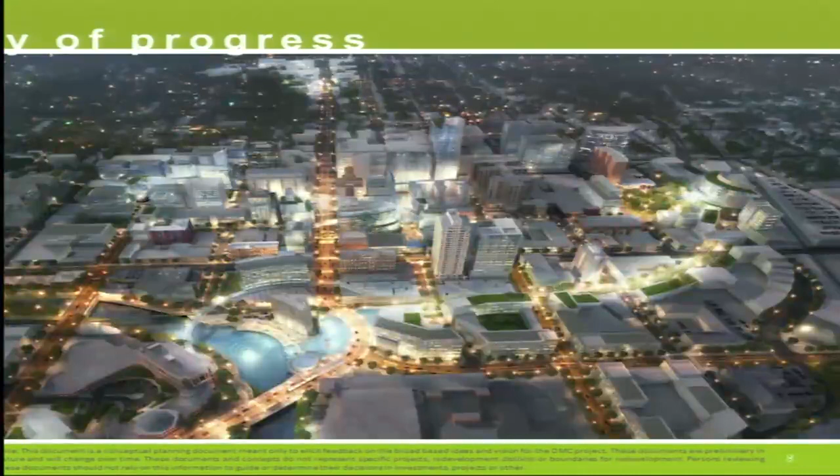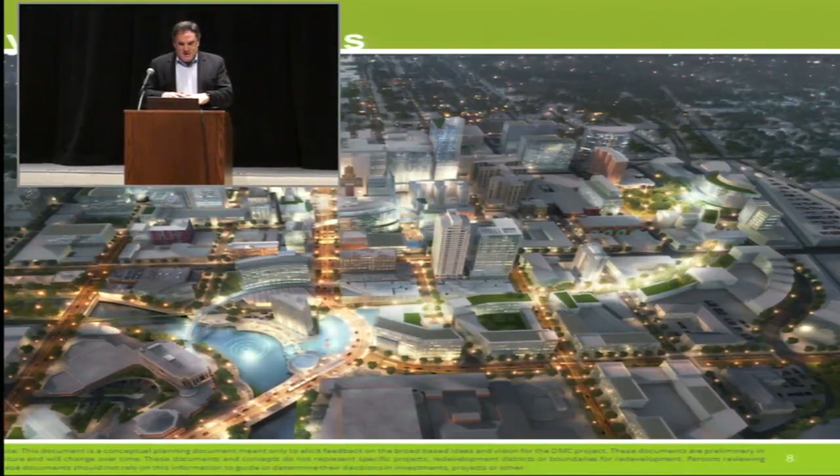This is an overhead view of what Rochester may look like 20 years from now. As Lisa said, the plan is illustrating $6 billion worth of investment. So we're taking that $585 million and investing it in a strategic and judicious way so we can attract development into the downtown and enhance the whole downtown area.

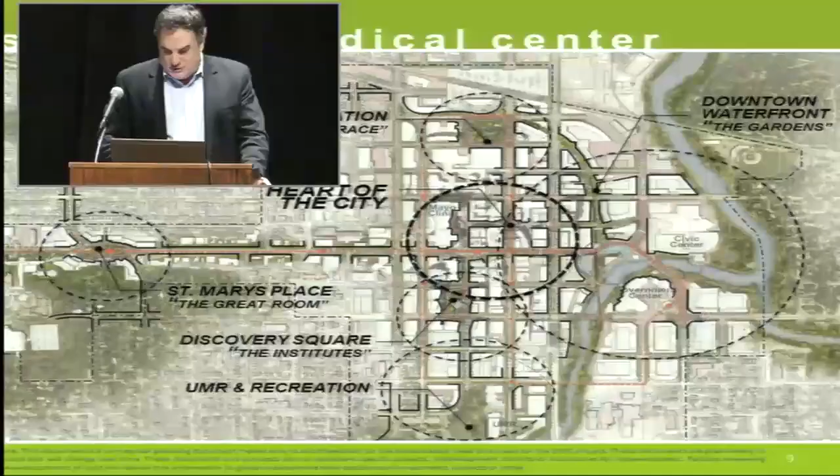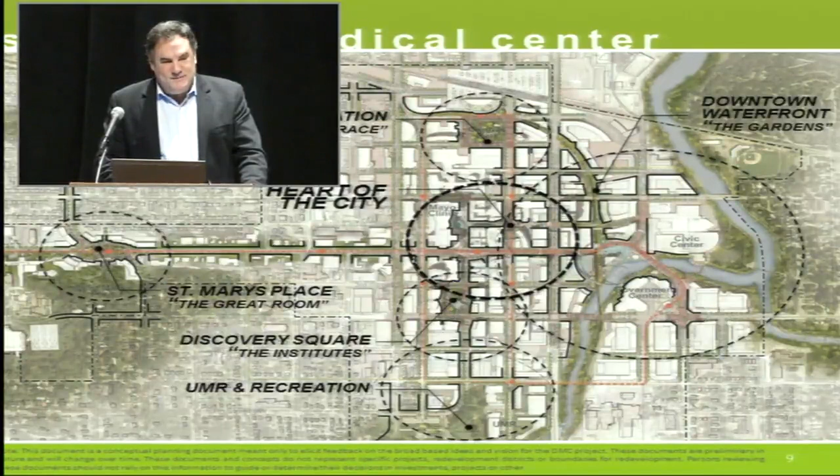So you see a very vibrant place, but you still see the structure and fabric of the existing downtown reading through this image. The plan is totally integrated—a series of key places that are very inclusive, that will create new addresses for residents, new businesses, and healthcare facilities, all connected in a compact urban core that makes it really convenient for residents to live within the heart of the city.

The heart of the city is really the first place where we want to start. It's the most visible part of downtown, and we've identified a location, First and First—that's First Street and First Avenue—where we think we can begin this development. We chose that location because it's right in the heart of Peace Plaza, but it's also within the heart of the existing cluster of buildings downtown. I'll tell you a little bit about what we've envisioned for First and First.

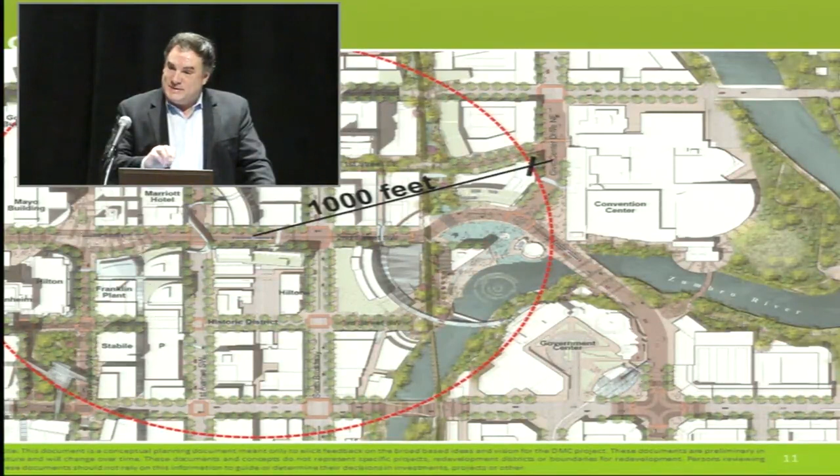The First and First location is part of this connected city. We use this diagram to illustrate what the city will look like perhaps in 20 years. Again, the plans are flexible, they will evolve. One thing we've talked about as a team is that even though the designs are very specific to illustrate the ideas, we can be very certain that as we go forward into implementation, these designs will continue to grow and evolve and adapt to the criteria we need to respond to.

So it won't look exactly like what you see tonight, but the principles will remain the same.

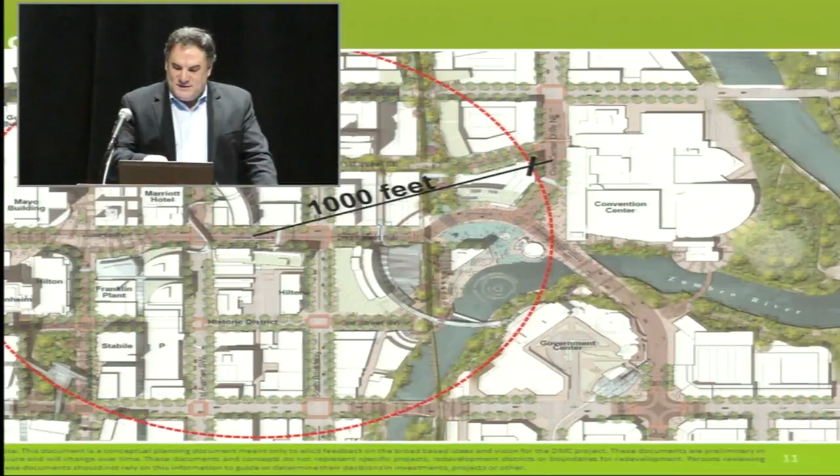The 1,000 feet is really to indicate how connected the downtown currently is. If you look at this drawing, you can connect from the Mayo Clinic at the Gonda Building to Discovery Square, which is just south, that beautiful park just south of the Gonda Building. You can get all the way to the convention center and the waterfront. All of Peace Plaza is connected within that 1,000 feet. So really all of the great destinations, amenities, and facilities within the heart of the city are very conveniently located with one another.

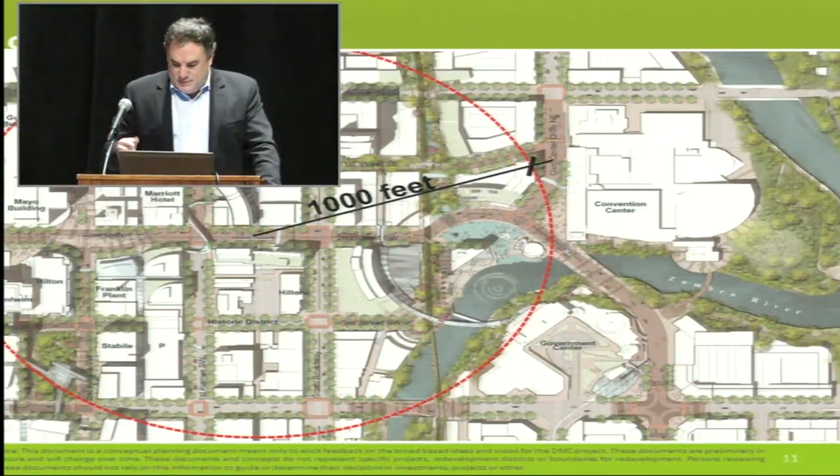We're going to take that attribute and build upon it as we develop this plan. We want to continue the vision established by the Plummer Building and the aspiration that reflects. Our architecture needs to be bold. It needs to reflect the new technology and economic development we want to create, while always respecting the past, featuring the past as part of the cityscape, and being inspired by the vision established many, many years ago.

So the First and First plan really contains many great places. It contains a new entry point that we're calling the Portal, which is on 2nd Street, right at the doorstep of the Gonda Building and the Mayo Clinic. It will be the front door to the Peace Plaza area and Mayo Clinic, as well as the front door to Discovery Square to the south.

We have a feature that we're calling the Light Pavilion. That's a covering over First and First that will be a must-see destination, marking that as the town square within the heart of the city. We'll talk about how that's going to generate new development within Peace Plaza and maybe correct some of the design flaws that we see there.

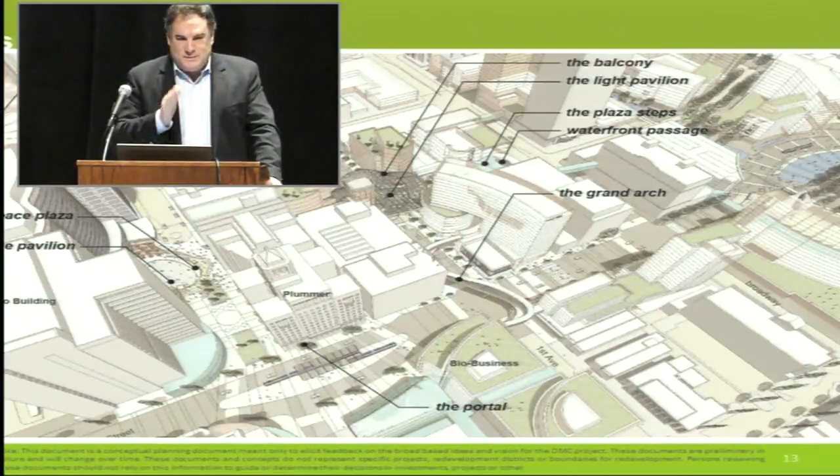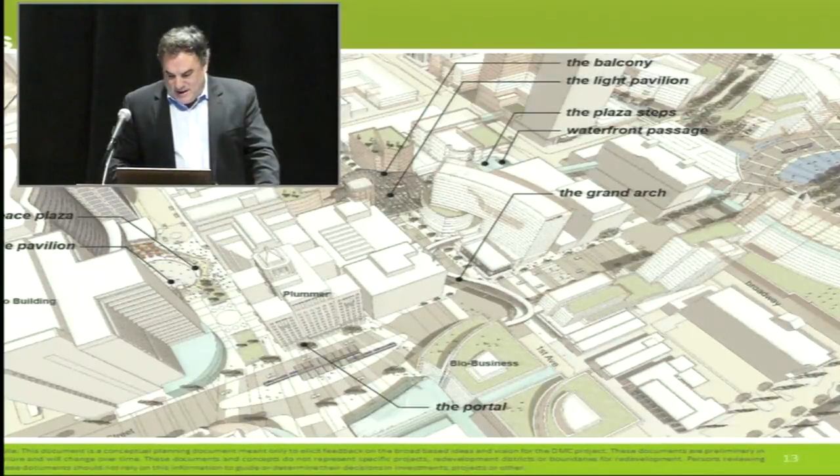We also feature the Plummer Building. It's a beautiful, iconic structure that already exists. How can we flatter that building by creating this beautiful crescent shape of space on 2nd Street, to flatter that building and make it an even more important structure within the downtown.

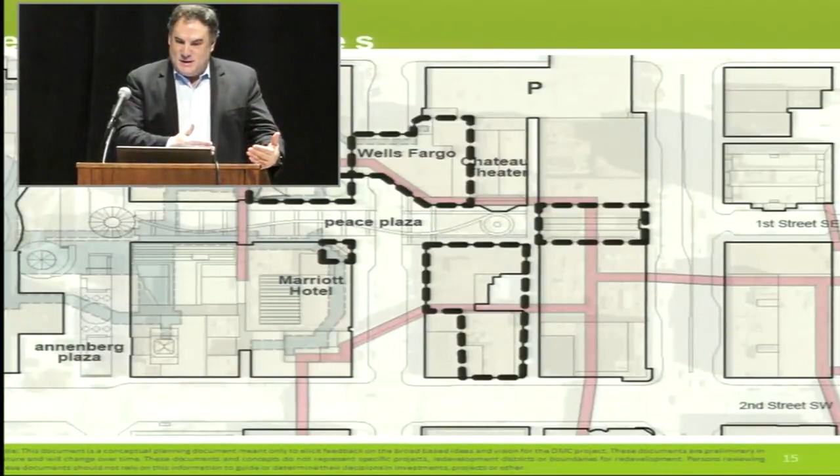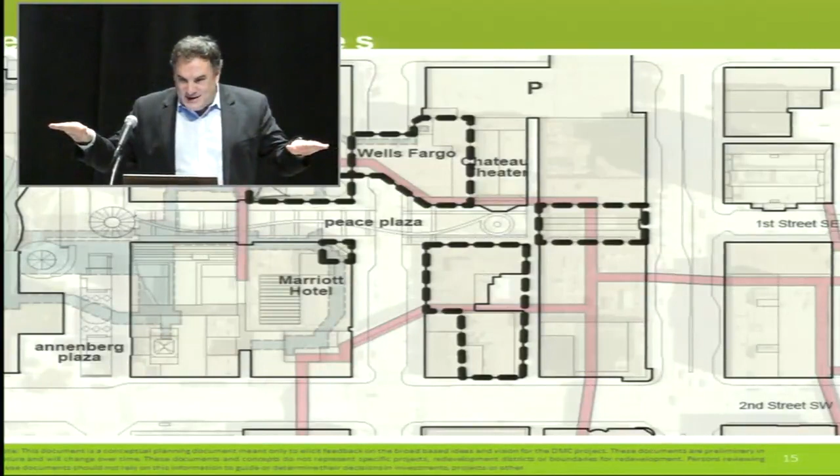We also have the opportunity to really connect the Skyway system and the subway system to the street. You go down in the subway on any given day in the wintertime, certainly at the Gonda Building, and there's lots of activity, lots of people walking around, but you go up in Peace Plaza and you don't see anything. So we want to reveal that activity and make it more connected to the street, and the same goes for the Skyway. This location is where all of those systems come together.

Here at Peace Plaza, we see a great opportunity to leverage the Chateau Theater. It's currently the bookstore, which is going to be moving out soon, and we see the Chateau Theater as a great opportunity to reestablish it as a theater, providing space for performances and cultural venues, but also using the theater as a way to theme this First and First location and make that location more dramatic, more theatrical, and more reflective of being the center of the city.

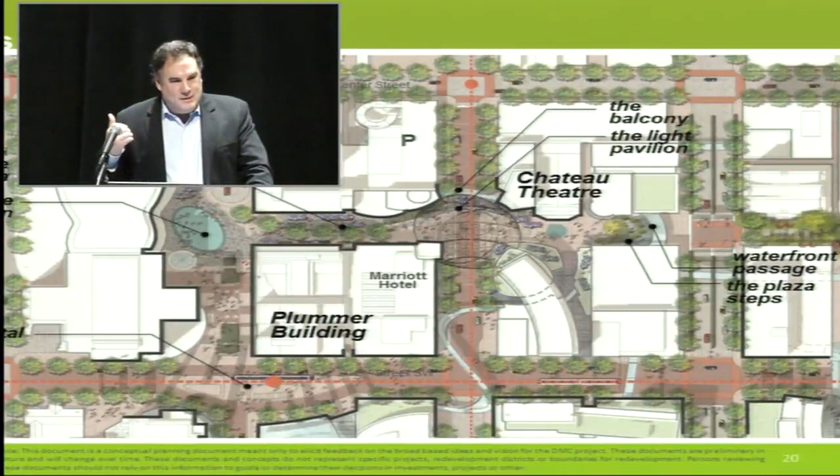Healthcare is generally a very scientific, and sometimes cold, environment, and we think bringing more active programs that are warm and inspiring will benefit patients, but it also will benefit the downtown.

Just to the south of that, along the Plummer building, we have the portal. We're creating a beautiful crescent-shaped public space at the base of the Plummer building, using the tower of the Plummer building as the axis of that space, so it feels specifically designed for the Plummer building. It also acts as a front door to Peace Plaza and the Mayo Clinic, and a front door to Discovery Square to the south.

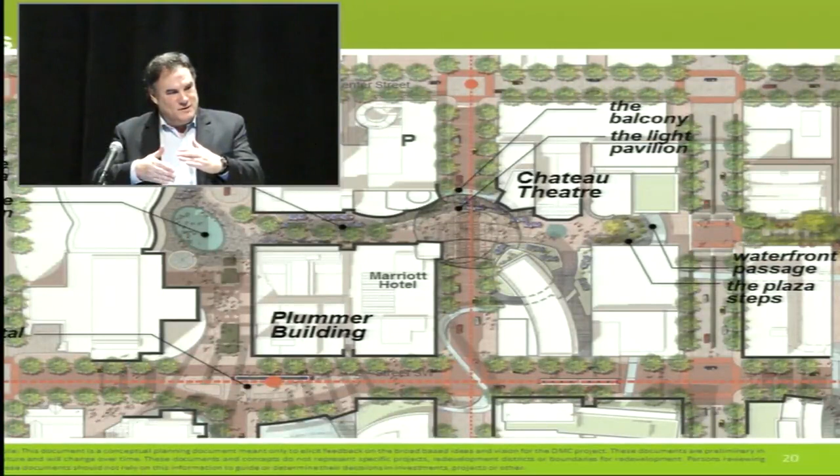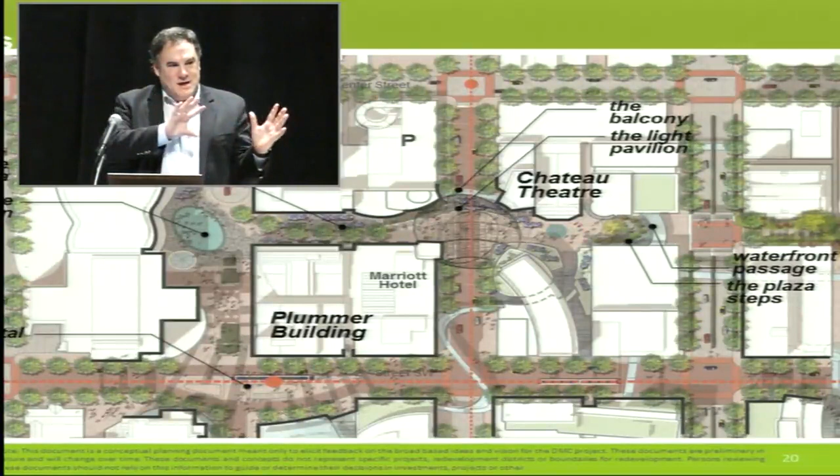On the far east end, we've created what we're calling the Waterfront Passage. This is the end of Peace Plaza that's currently blocked off with the shopping mall. There's an entrance there, but a lot of people have said it'd be great if we could make a stronger connection to the east. That connection is very important to developing our downtown waterfront. We want to take that activity and make a free flow between Peace Plaza and the downtown waterfront.

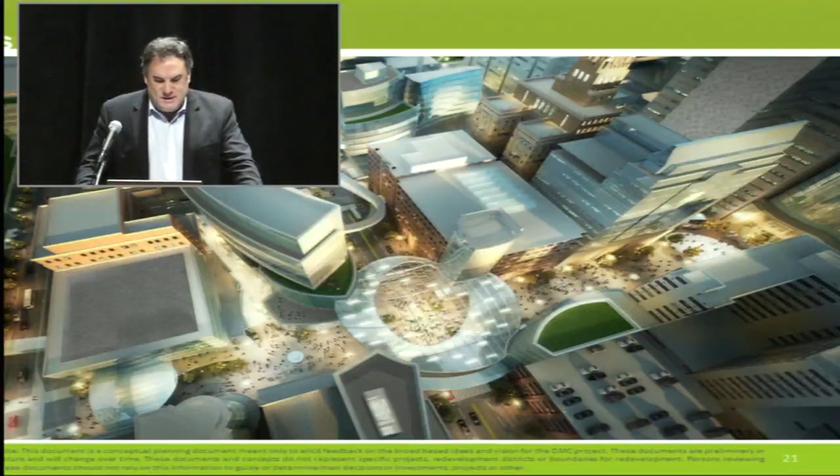So this is an overhead view of the Light Pavilion. You're looking to the southwest. The Light Pavilion spans across First and First, and it's sort of a ceiling over a great space, like the Galleria in Milan, like Potsdamer Platz.

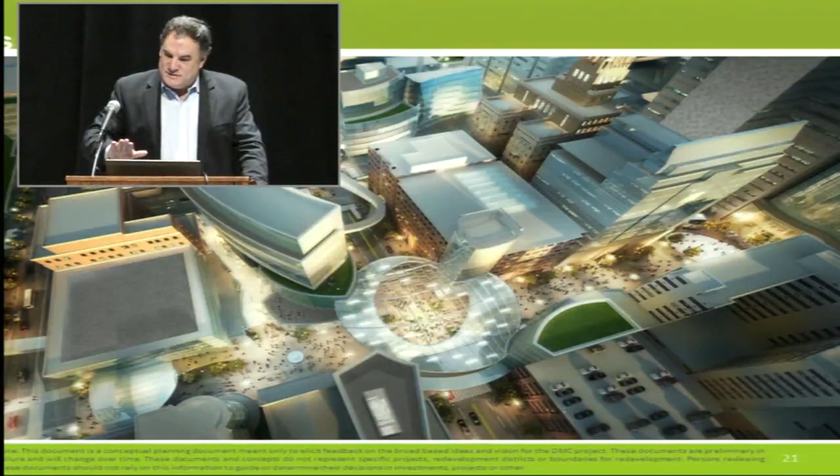It's connecting four blocks. We've recast the bank building so that it becomes a beautiful terrace that overlooks Peace Plaza. We've connected the Chateau Theater into the architecture and placement of that space so we can bring in the historic qualities and the great memories of the Chateau Theater.

We've also shown new development. Some parcels have been bought recently by developers, and we want to encourage that private development, but use it in a way that complements our overall vision. So it's totally integrated, specifically designed for this place—it can exist nowhere else but at First and First in Rochester—and we think this is a great way to accentuate the heart of the city.

On either side, you see on the right-hand side of the screen the Ice Pavilion. I'll show you some more photos of that.

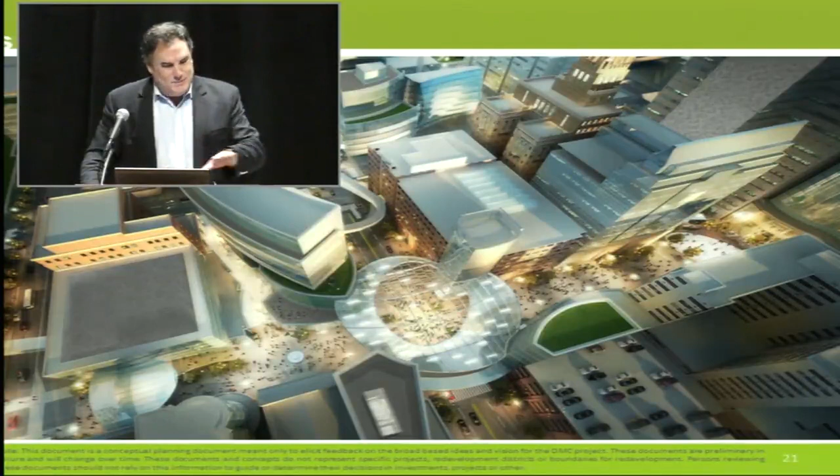On the left-hand side of this, you see the waterfront passage that we're creating to move to the downtown waterfront. This balcony space is like the balcony at the Chateau Theater, and this is a view of the Lincoln Center balcony just outside the theater doors.

We want to create a place for people to look out during performances and see the activity happening in Peace Plaza, also creating a beautiful dining vantage point for people to have meals before movies at the Chateau Theater or before they go shopping. We want to reveal that activity in everything we do in this space.

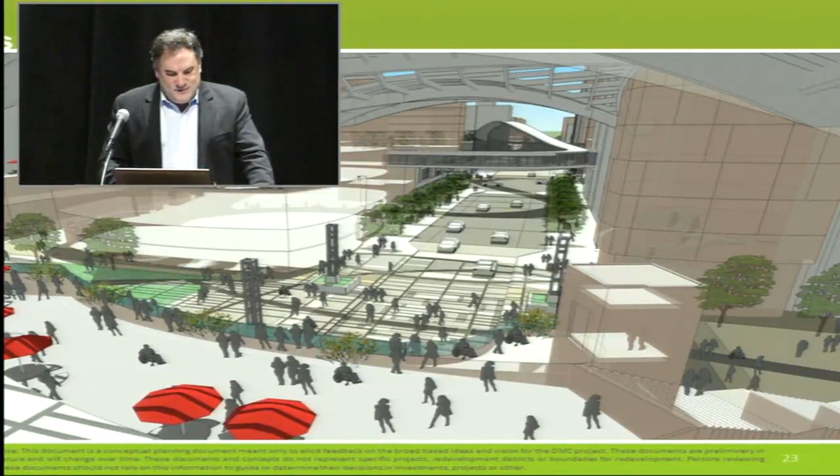This is just a sketch view of what that might look like. You see the beautiful balcony in the foreground there, looking south on First Avenue, and all 4 corners totally integrated into this plan, with a beautiful ceiling across the First and First location.

This is the Gonda building base, and even though it's a very beautifully designed base to the building, it's sort of closed off. It also has the subway and skyway system all coming together in that location, and you see the photos on the right-hand side.

The spaces in the subway can be sort of foreboding and very mundane, so we seek to really open them up and make them more contributing to Peace Plaza. We think we can open up the base along Gonda Tower and make it something that really contributes to the overall activity.

This is a view from the atrium space within the Gonda Tower. You see the Plummer building in the distance, and you see the ice sheet in the center of this view.

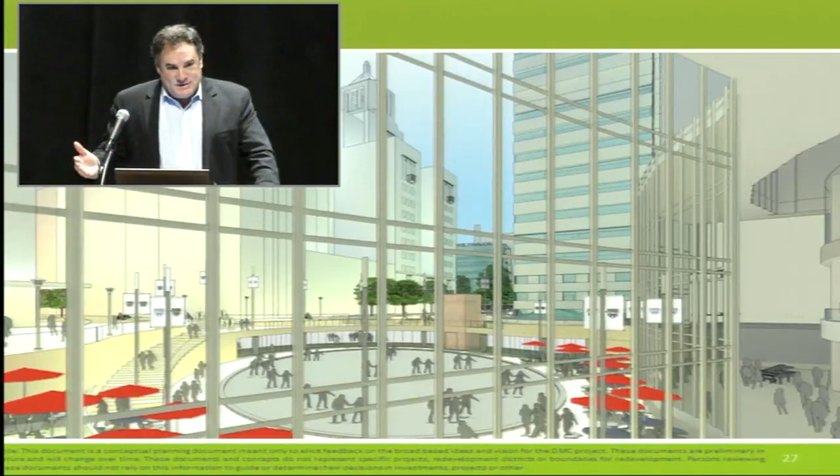The existing passages will look out on this beautiful plaza, so daylight will come down into the subway system, and this will create a more welcoming and warm atmosphere for visitors, patients, workers coming to the clinic, as well as people coming to Peace Plaza.

This is another overhead view of how that space might be knitted into the fabric of Peace Plaza, again reflecting the entrance to the Mayo Clinic, the Kaler building, reflecting the entrance to Peace Plaza, but really creating a central place, a real crescendo at the west end of Peace Plaza.

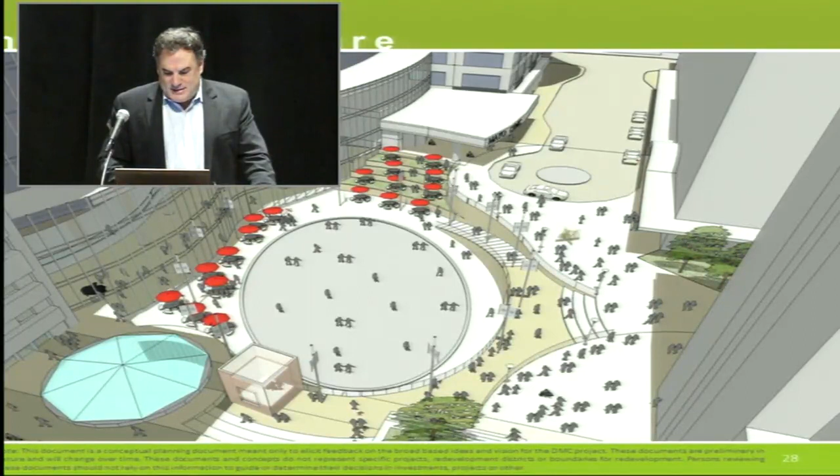And then on the east end, we have the shopping mall. The gesture is there—there's a passage, there's doorways that allow you to go east to the waterfront, but it needs to be made more gracious, grand, and welcoming.

We use this moment to talk a bit about downtown businesses. You see these plans and how we're creating new development, but we want to talk about how local businesses can make up that fabric and that activity and economic development within the downtown.

I'm going to ask Bill to make a few comments about businesses that are local to Rochester and how we keep that as part of the plan.

Thank you. The development program for the plan is based on a market analysis that we talked about in the summer. In that, we were looking at the incremental growth, and so the plan reflects the existing inventory of space for businesses and then accommodates incremental growth beyond that.

So it's not accommodating space to replace what already exists. To the extent there might be a site where somebody replaces what already exists, that inventory could be added in addition to what was estimated in the market analysis.

But there's also a strategy for when you're positioning a downtown to create that authenticity that comes with locally owned businesses.

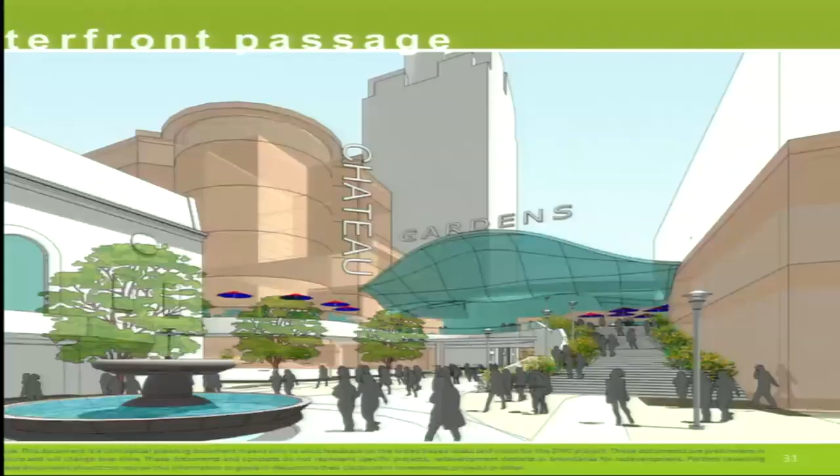So to continue then with Peace Plaza, this is the east end of the Peace Plaza, recast to create a beautiful canopy and a welcoming passage that will take you to the waterfront as well as connect to the Skyway system and also flatter the Chateau Theater. Again, we want to extend the energy of Peace Plaza and create more opportunities for those local businesses to really populate the ground floor retail and make a really truly unique Rochester type of place.

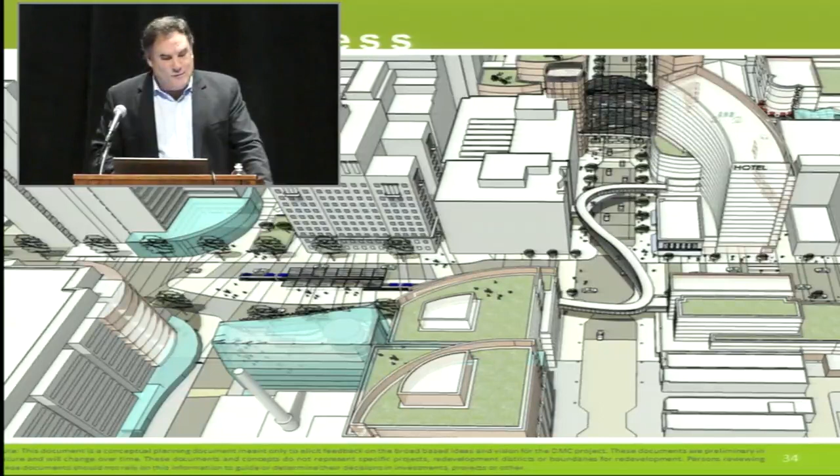We also will create ground level passages that are weather controlled so that we don't rely exclusively on subways and skyways, and really keep the activity at the street level. As I said earlier, we're using the great architecture that currently exists at the Plummer Building and other areas within the downtown and making it really a focal point within the plan, creating this beautiful portal space on 2nd Street that looks like it was specifically designed for the Plummer Building, making a front door to the Mayo Clinic and to Discovery Square.

So that's a good transition to Discovery Square, which is really the focus of a lot of the economic development that we see within the plan. This is 2nd Avenue, looking back to the north towards the Gonda Building and the Plummer Building. Today it's a parking lot, but we see an opportunity for lots of new addresses for science and technology in the city. So this is the overhead view of Discovery Square.

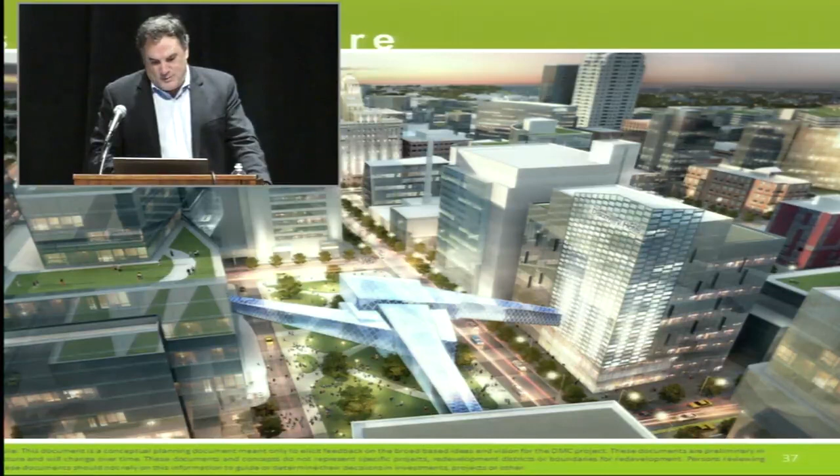Again, looking north, we see new development all built around a beautiful urban square that will not only create the address for science and technology and a global destination for these new companies and businesses to be located, but also a great place for the residents and visitors of Rochester to enjoy as part of an urban experience. We will have architecture that's very adventurous, but also keeping a memory of the past and always featuring the past in everything that we do.

The translation cloud will be one of those features that we incorporate within Discovery Square. We'll also build upon the existing Bio-Business Center, and we will grow that and give it even more of a greater presence on 2nd Street and on to Discovery Square.

We see Discovery Square being an authentic urban place, much like Union Square in San Francisco, where normal urban life occurs, but it also creates a wonderful address for economic development and science right at the doorstep of the Mayo Clinic. This is an overhead plan view of what Discovery Square would look like.

We've taken what was once a parking lot and made a beautiful urban square, providing automobile access and streets all around all four sides. We've created development parcels around that square so we can locate the new lab buildings, the new science and biotech buildings, giving them addresses on that space, woven into the fabric and structure of the downtown street system.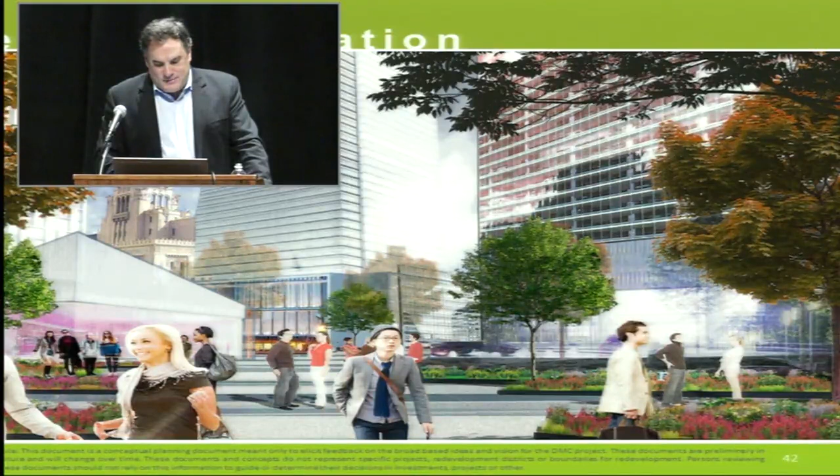Another place we've created is the downtown waterfront, a new neighborhood we're calling the Gardens. We want to build off the natural features of the downtown Zumbro River, as well as the open space amenities that currently exist. There's a beautiful opportunity here to finally connect the downtown to the waterfront for the first time.

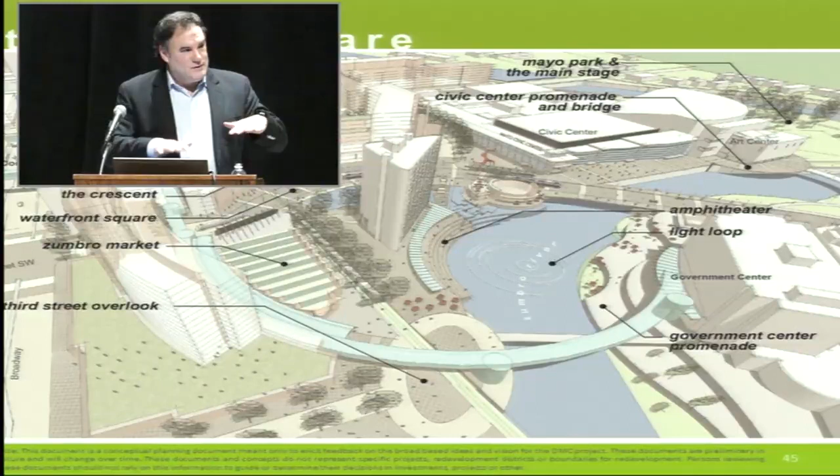We've created a very exciting, bold plan that takes all the land surrounding the bend at the Zumbro River, right at the foot of 2nd Street, and integrates those parcels in a way that embraces the waterfront, reflects the bend in the river, and incorporates other water elements so you see water when you look down 2nd Street. There's been a lot of commentary about how the river is hidden from view by the walls and because the water is lower, and we've found ways to create additional water elements that look connected to the river but are up at city level, reinforcing and extending the river's presence within the downtown.

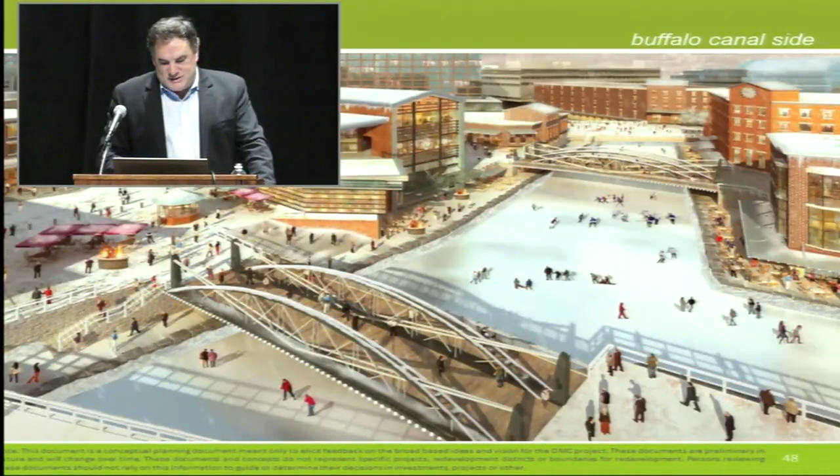In Providence, Rhode Island, they've taken their river and made it a water town square, which has totally transformed downtown Providence. In Buffalo, we're doing the same thing, creating new canals that look like an extension of the Buffalo River, a nod to the Erie Canal where it started at Lake Erie and the Buffalo River, creating new water environments that extend the river environment.

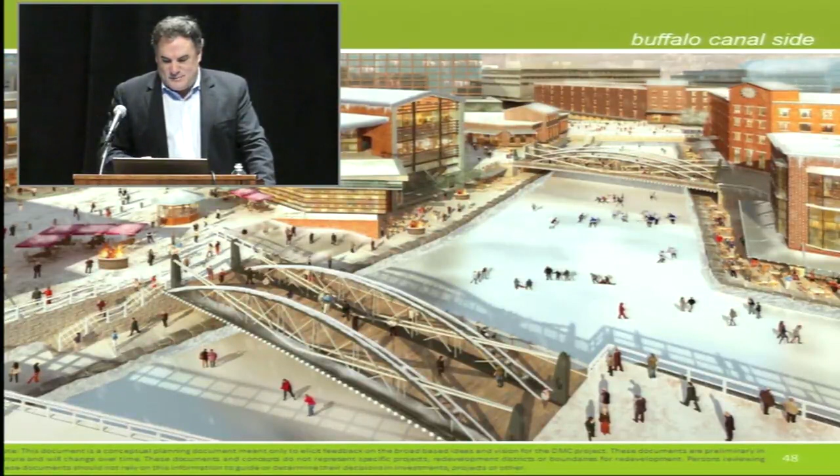This plan also currently shows an option where the library is relocated within the downtown plan. We looked at this because, while examining the waterfront and its opportunities, we understood the library is looking to expand and grow, and we see an opportunity to marry that aspiration with a chance to create more public space at the riverfront, while still incorporating the library within the overall downtown plan.

The actual design, location, and plan for the library is still to be determined, but we think there's an opportunity for the library to better expand its programs while also creating a great new public space right at the foot of 2nd Street and the Zumbro River.

This is the overhead view showing the space called Waterfront Square, which is currently where the library is located. We've taken 2nd Street and created a gentle curve in it to reflect the bend in the Zumbro River, and we've also repurposed the railroad spur as the Crescent, which will have many cultural venues and amenities anchoring it as a great new urban neighborhood.

We've incorporated the Zumbro Market right adjacent to that railroad spur, where we'll have a farmer's market, gourmet shops, and restaurants that really create an attraction to the downtown.

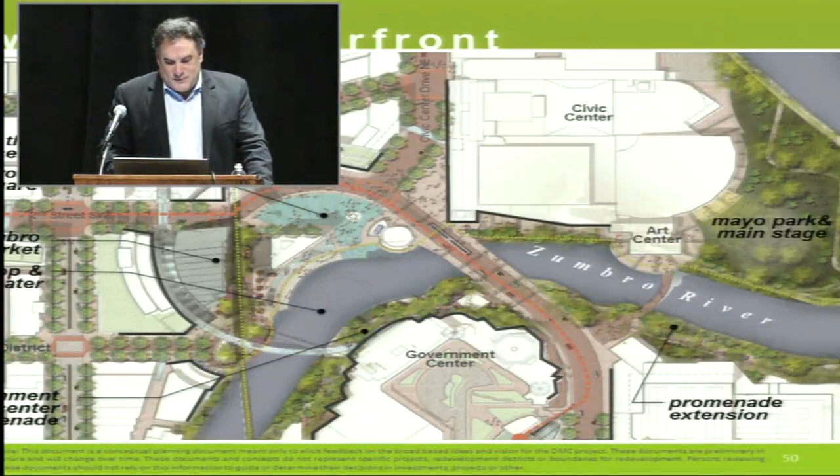You see also in this plan, the Civic Center has expanded into the oval right at the front door of the Civic Center, and so it actually feels closer to the downtown. We've created a beautiful new setting for visitors to see out to the water as they come to the Civic Center, with many amenities to utilize there, as well as for residents to gather and create a waterfront square that belongs to the entire city.

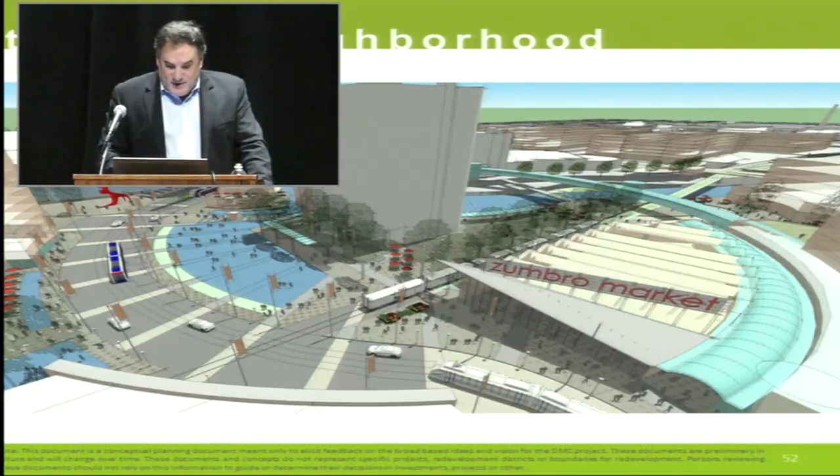2nd Street is the curving street on the left-hand side. The Zumbro Market is on the right-hand side—that's currently a parking structure at the end of its useful life. We think that would be a great location to have the market be a real anchor to this neighborhood. You see the water has been brought up to city level and is now the terminus to 2nd Street. We've also repositioned the Skyway so it embraces the water and integrates the waterfront, the Civic Center, and other development within the heart of downtown.

There's been a lot of questions on how we've recognized and incorporated historic fabric. If you look closely at our plans, we've reinforced all the historic gems that currently exist within the downtown. As the waterfront is concerned, we have historic 3rd Street right there within our plan, and we like the small scale of the historic buildings. We like the memory, the tradition, and the culture they represent, and the local businesses that usually inhabit those storefronts. That will be a big part of the plan, not only in the waterfront, but in all areas within the downtown. If you look at our plans more closely as they come out, you'll see that we've taken great care to reinforce those historic elements so we build a full, beautiful downtown that has history and new together.

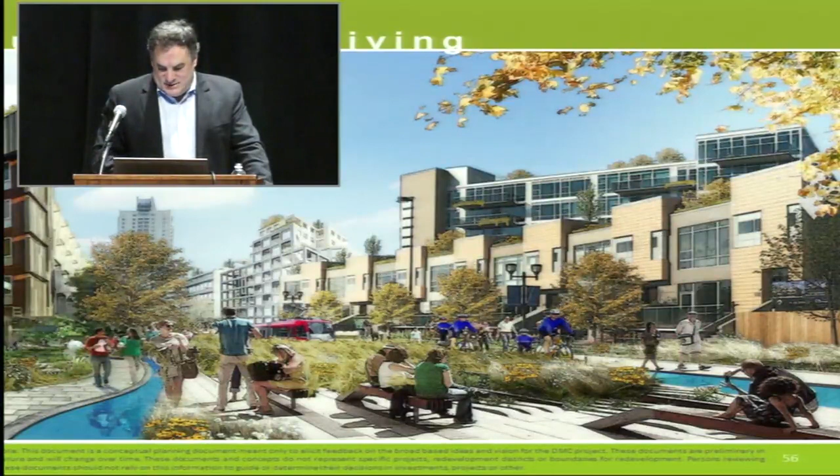There's also a lot of questions about affordable housing and how we'll integrate that in the plan, and I'll use the downtown waterfront, the gardens, as a way to explain our strategy. We will have a full range of price points and a full mix of housing types throughout the plan. This is a view of the gardens along the Crescent—you see low-rise townhouses, mid-rise buildings, some taller buildings. There'll be a full range of housing types and price points so we have a very inclusive and diverse community that inhabits the downtown, attracting the best and brightest from all over the world, as well as providing for residents that currently exist in Rochester who want to take in the downtown and make it their home. We'll incorporate that in the Gardens District, but also in all areas of our plan.

We also focus on sustainability, and people have asked a lot of questions about how sustainability will be integrated into the plan. Using the Gardens District as one example, we have a sustainability framework that's been utilized and established throughout the entire plan. In the Gardens District, we have water elements that, as one feature, will collect rainwater, filter it, and use it for irrigation, making the water cleaner and the environment more integrated with nature, among other strategies and elements included in a very full sustainability framework.

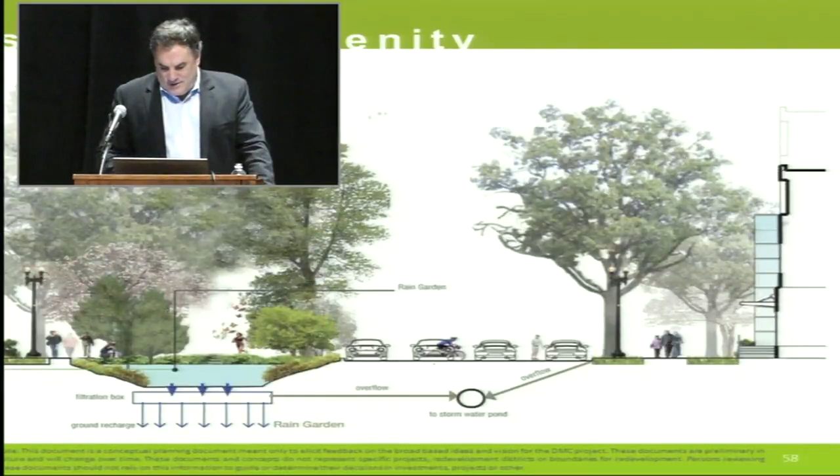Again, not just for the downtown waterfront and the gardens, but throughout the entire plan, the sustainability framework includes many components. It's not just about solar panels or windmills, but really a full lifestyle change that we want to propose for the downtown, making Rochester a model for sustainability and keeping those elements as part of all the new development projects we show within the master plan.

So this is an overhead view of the future waterfront square, looking to the west down 2nd Street. For the first time now, you'll see water at the end of 2nd Street. We have lively uses all around the water edges—new public spaces, restaurants, cultural venues, landscaping—really making it a place that will attract visitors and residents, and be a beautiful, postcard-like view of how Rochester created its authentic downtown waterfront.

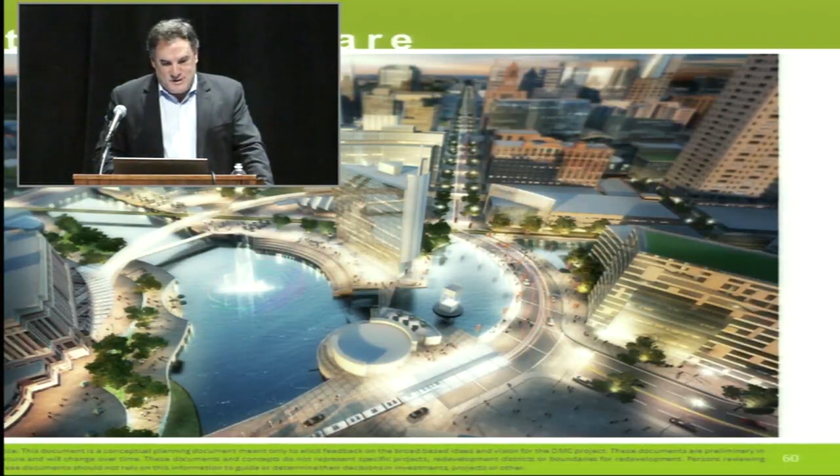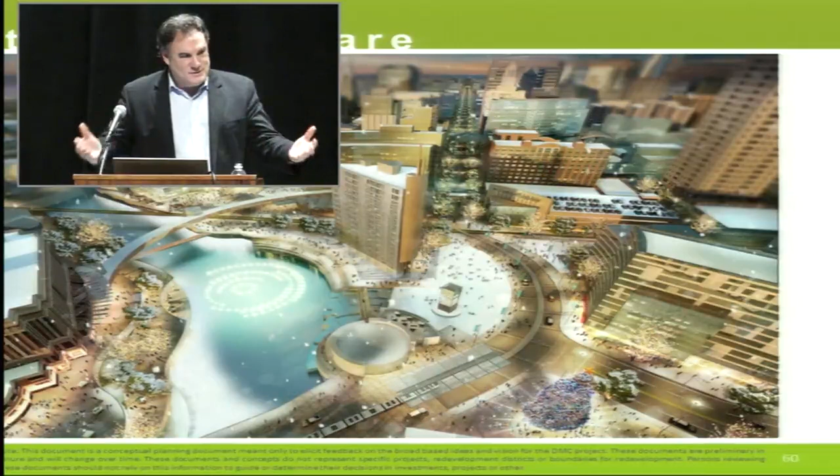And then, of course, for days like today, we will make sure that the design is done in a way that we have winter programming. We're showing here how the water at the foot of 2nd Street can be turned into a beautiful ice sheet, and we can have the giant Christmas tree by the convention center and other displays and elements that really make this a place that people will want to be in the wintertime, even when it is cold outside. So we've tried to make this something that really appeals and reflects the climate and the fabric of the city.

The next place is called Central Station, and this was an opportunity for us to take advantage of Central Park, which was an amenity that's sort of hidden in plain sight. The existing park is a beautiful oasis, and there's plans to redevelop the park, and we want to make that part of the arrival experience that people have when they come into the city. There's empty lots up by the railroad tracks that we think we can develop into transit amenities and parking amenities, so that we take the cars and the buses off the streets and put them up by the railroad tracks, but then use Central Park as the front door and the first thing that people see when they come into the city. Instead of seeing a parking garage or a highway, they see a beautiful green square.

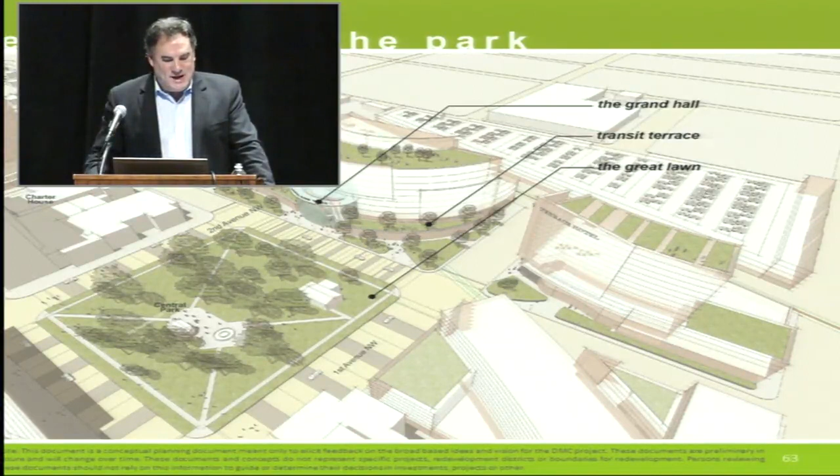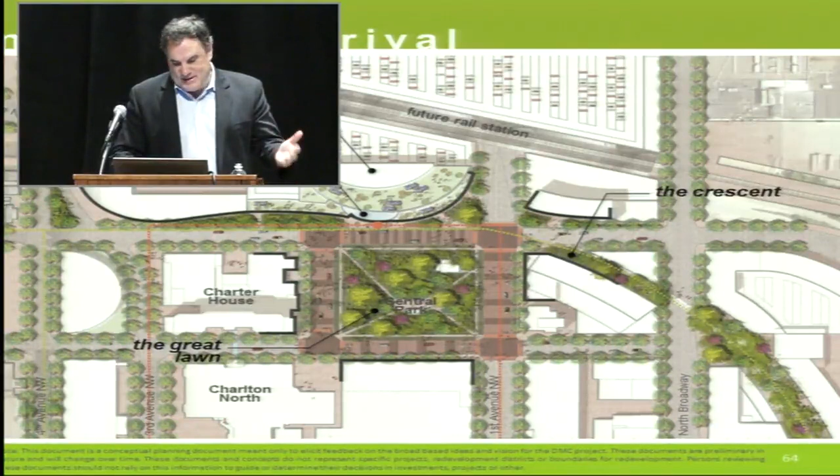And the wonderful opportunity that we have here, not only with the park, but its location, is that it's within very close walking distance to the downtown. So even though Tom will talk later about the transit facilities and the circulator that we're proposing for the downtown, this location on a nice day is also just 2 blocks away from Methodist Hospital, 3 blocks away from the Gonda Building, and other destinations within the downtown, so you can actually walk as one of your choices to arrive into work, and walk past a beautiful square as you come into the city.

One of the final places that I'll talk about is St. Mary's Place. When we first looked at St. Mary's, we saw how disconnected it was from the downtown, yet it's also one of the first things that you see when you come to the city. We saw those characteristics as a way to create a great new place that connected the campus to the downtown, and at the same time create a positive first impression as people arrive. We talked about how the highway architecture as you come off of 52 does not say anything about the culture and the excellence that Rochester represents. We think we can create something that's really much more dignified and reflective.

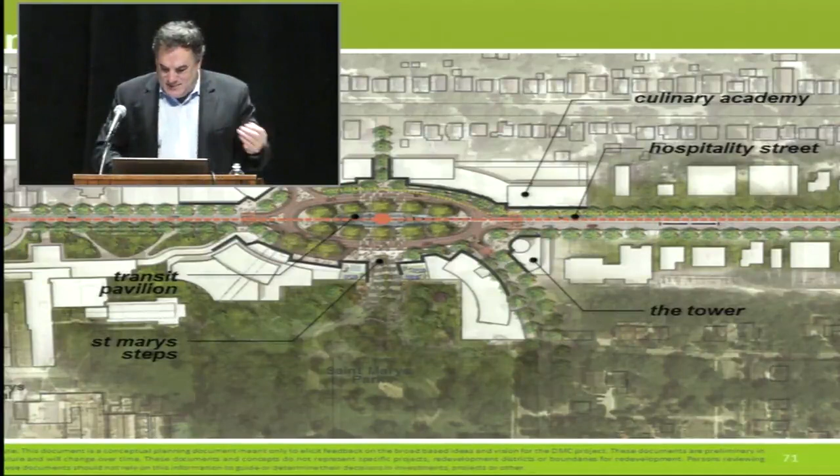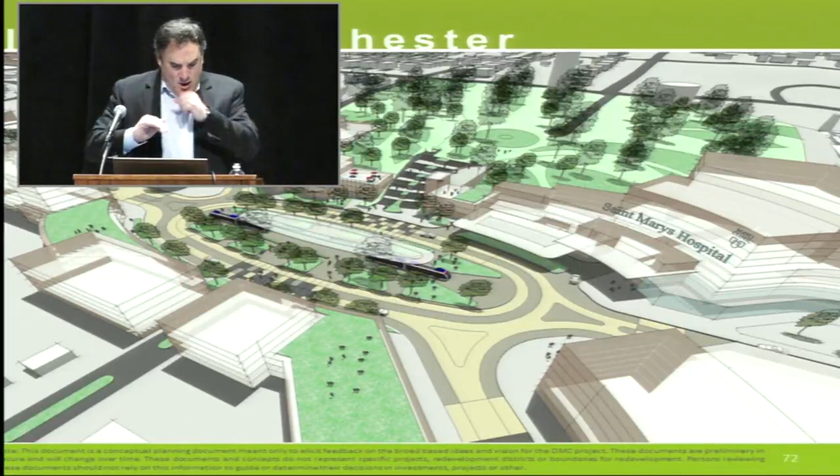St. Mary's is much more connected to the downtown. We've actually moved the front door of St. Mary's about a quarter of a mile further east, making it more connected to the overall city. This is an overhead view of what that might look like. We would make a connection up to the park with a stair, but also provide elevator access for ADA, so everyone can get to the park and move freely about the space.

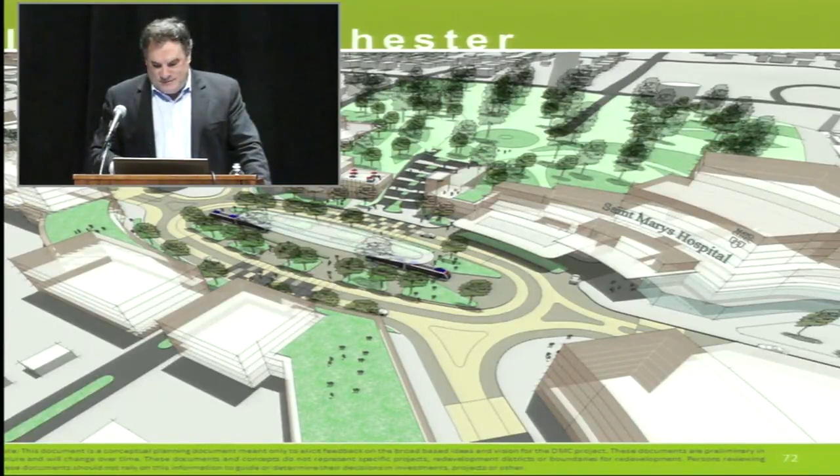The scale of development will be low scale. It'll feel more like a hometown arrival, really reflecting that attribute of Rochester that is really valuable - we have a hometown that really reflects a great address for Mayo. And so that will be the first impression people have.

So in conclusion, we see a city of opportunity, a totally integrated development, connecting the waterfront to the downtown, enhancing the city with a series of great public spaces, and creating a great place for people to both live and work within the heart of downtown Rochester.

So Tom's going to talk about the - sorry about that. Tom's going to talk about the transportation plan. Thank you, Peter, and good evening, Rochester.

Transportation is a key element of helping to realize this great, exciting, and I think very realistic vision. Transportation, as Lisa mentioned, is something that really supports all the aspects of what we're trying to create here - a fantastic, livable, healthy, vibrant community. So we've taken some of the questions that we've been hearing and hope to answer some of those as we talk a little bit about the transportation plan.

One of the things we recognize with this exciting initiative is that it means we're going to be bringing a lot more people into what's already a very job-rich downtown.

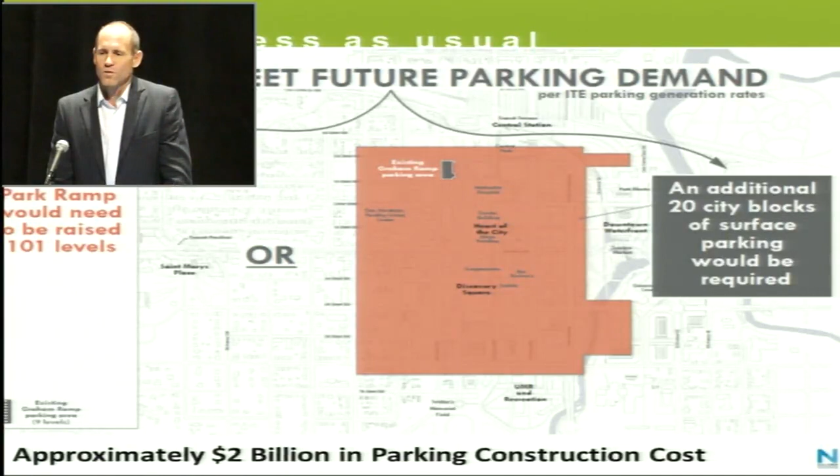That's good for today, but as we see this type of growth, we can't continue at that rate of mode share. We've done analysis, and that shows us if we kept a 70% drive-alone mode share to downtown, and we accommodated that through surface parking, we basically take up the whole downtown. If we built 6 or 7 story parking garages, we'd eat up 8 or 9 whole blocks of downtown with surface parking. If we tried to put it all in one ramp, we'd be 101 stories in the sky - pretty inconvenient if you're on the top deck.

So one thing we've done through this plan is recognize where we need to get to in terms of future mode share. As we look out to 2035, we know we need to get that drive-alone mode share down to about 50%. We'll expect more people to be walking as we build compact urban neighborhoods and move people downtown. We hope more people will take transit, and it's really imperative that we continue to improve the transit system. We need to get at least to that 50% auto mode share if we want to keep the system working and keep the major intersections into downtown from becoming overly congested. But we hope we can do even better than that, and create more space for the great places Peter's talking about.

One thing I want to emphasize: people ask us, well, I'm not going to take transit when I come downtown to eat at night. When we talk about mode shift, we're really talking about commuters and the peak travel periods. We're assuming a lot of people will continue to drive, and they'll have to drive. Patients coming to town are going to drive downtown to get close to where they want to go. Visitors, both local visitors and retail customers, we expect will mostly drive downtown, and we need to make that experience convenient, affordable, and reasonable for them. And 50% of commuters will likely continue to drive. The people we're really talking about changing behavior for are the day-to-day commuters, the 9 to 5, 8 to 4 kind of folks who have good options and can conveniently use other modes, and maybe long-term visitors and people looking for cheaper options as well.

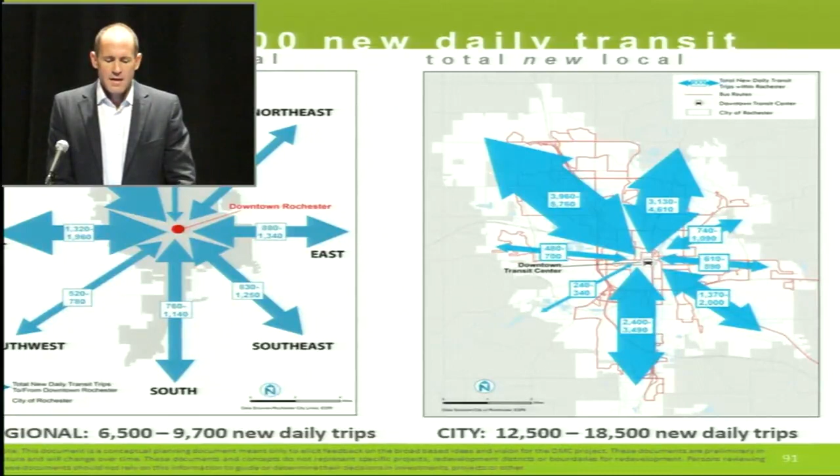So we're looking at a challenge of bringing people not just from Rochester and the suburbs of Rochester, but really from all over the region, the far side of the Twin Cities, neighboring states. We want to capture them on buses to come in, at the remote park and rides around the edge of the community, and at the periphery of downtown too. We want to give people options that work for them. As we look to the out years of the plan, we're expecting transit ridership to triple, maybe more — 19,000 to 28,000 new daily transit trips into downtown, as many as 100 new commuter coaches daily coming into the city.

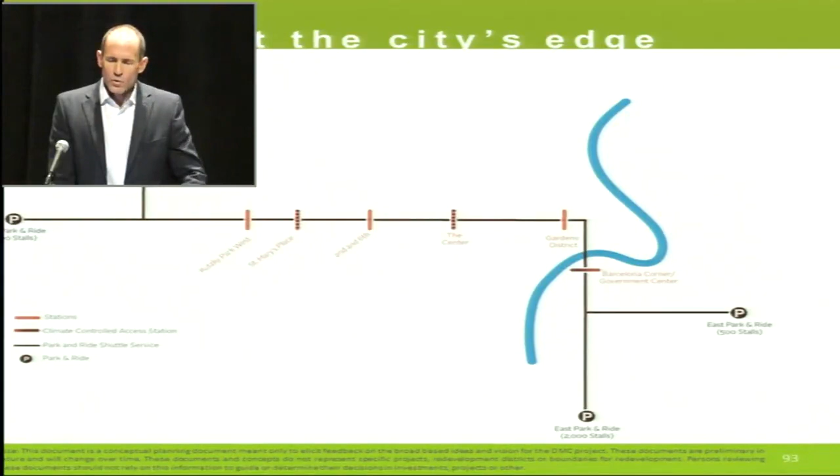We really want to invest in a permanent, high-quality park and ride system with park and rides at the edge of the community, hopefully more than just commercial parking lots or a Walmart parking lot, but places that are really neighborhood mobility centers where you can ride your bike on a nice day, or walk to a center where you've got a comfortable wait for a bus that comes frequently and into the late hours of the evening.

We're looking at larger vehicles to make those rides comfortable. And in the downtown, as Peter mentioned, we're looking at a new mobility tool that's both a way to get around downtown, but also a way to connect peripheral parking facilities at the edge of downtown and create park-once mobility. The east-west alignment is the one we want to focus on building initially. The north-south component we think could come later as development around the Central Station and Discovery Square area comes online.

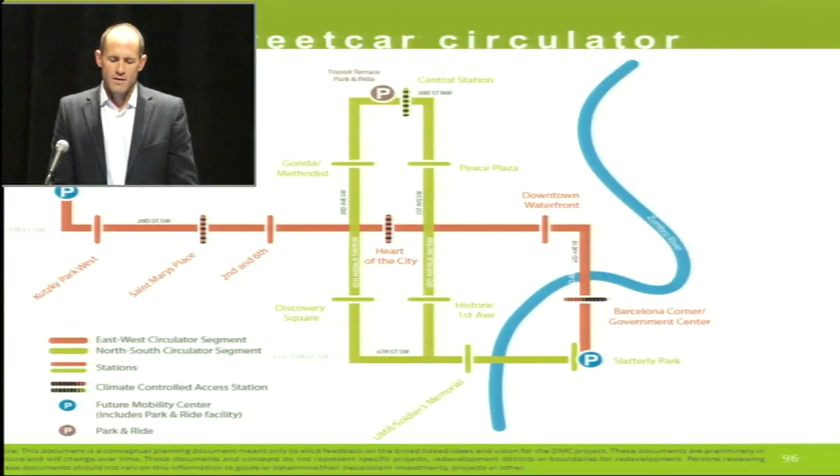This is a modern electric transit that we're seeing built in cities of all sizes around the US, and certainly very popular in mid-sized cities in Europe. It provides a great level of accessibility and stable ride quality, something we don't see on bus transit. It's great for people in wheelchairs, people who have mobility problems, people with strollers—a much more comfortable type of transit. It's one that's been shown to really activate business.

Tucson opened a streetcar just earlier this year, and this summer they've seen business activity along the streetcar line more than double. Many people have asked us, can we really do this here in Rochester? Come on, we're not that big a city, we're not Seattle, we're not Portland. But as we look at the numbers, the amount of people simply riding a shuttle between Mayo downtown and St. Mary's already exceeds the number of people using the South Lake Union streetcar in Seattle on a daily basis.

And that's just one piece of the market we're talking about. So we think the demand's already there today. You're already investing a lot of resource in that corridor—we can harvest that to make a better public transit service that's fast and reliable. The other thing we want to focus on is making sure that as the city grows and congestion increases, there's a reliable path for all the bus transit coming into and through downtown, getting people to employment sites and to the new central station location.

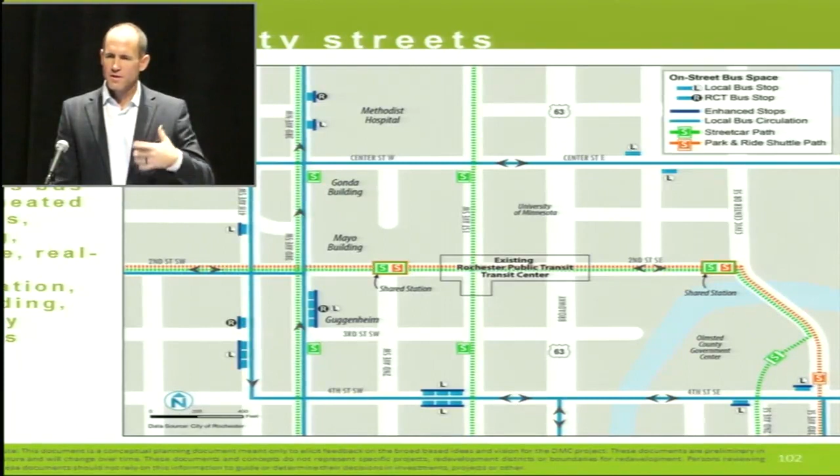So we're talking a lot about transit priority streets, creating transit lanes, creating great places for people along with efficient transit facilities. That means new high-end facilities with good information, heated shelters like you have on 2nd Street now, to keep people comfortable in the cold weather.

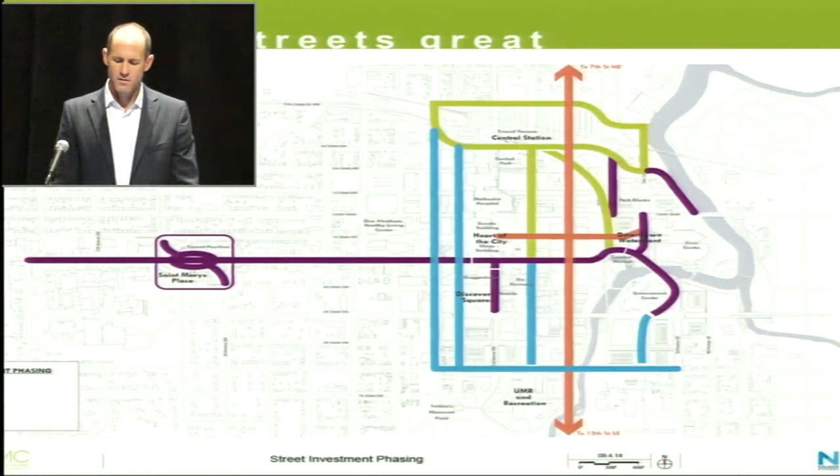We've got a lot of questions about how the street system changes under this plan. We've had a lot of ideas floating around, so I think people want some clarity around what's really going to be different about the downtown streets. These are the streets that the DMC plan has investment in over the next 20 years, and I want to focus on a couple that are of higher priority and probably likely to happen sooner.

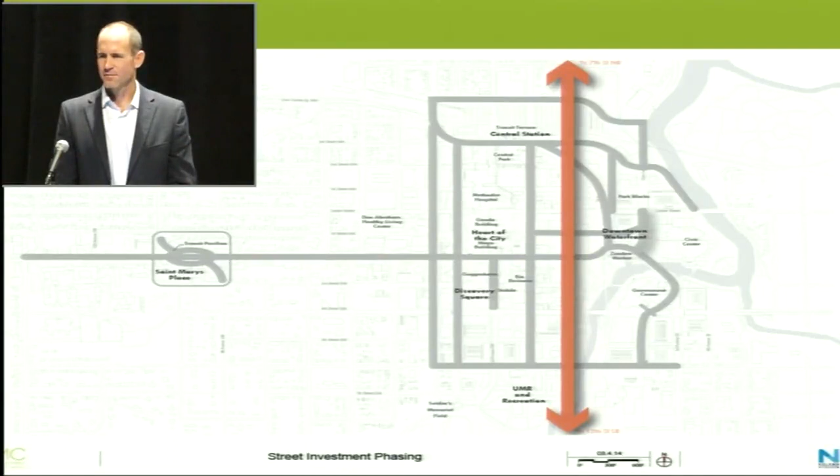One being Broadway. This is a corridor that really was the historic Main Street, the highway through-street for many years. It's got great historic bones along it, but it's a place that doesn't feel safe to cross and doesn't feel great to be along either. So we want to slow it down, we want to make it safer. We expect it's still going to carry a lot of traffic—we're not reducing traffic lanes, but we're tightening up the street, making better pedestrian spaces, eliminating some turn movements.

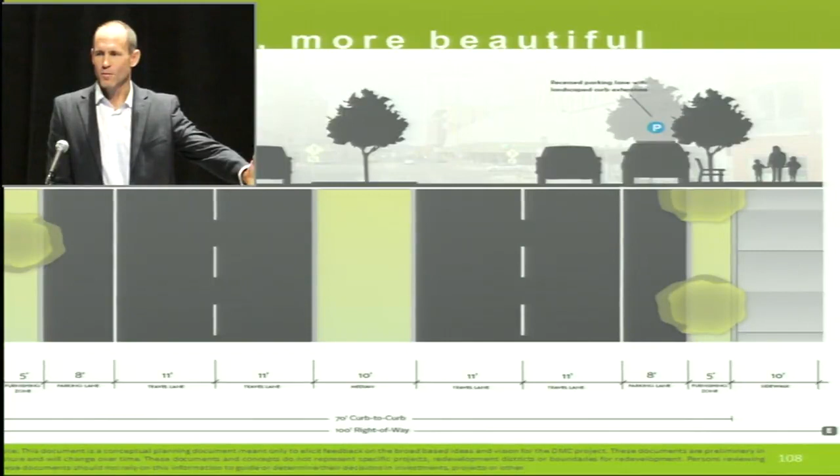So at 2nd and 2nd, you can actually cross the street from the great space of the portal Peter talked about to the new waterfront district without feeling threatened by turning traffic. As we see around the country, these types of investments in great main streets really pay dividends in terms of jobs and attracting local businesses.

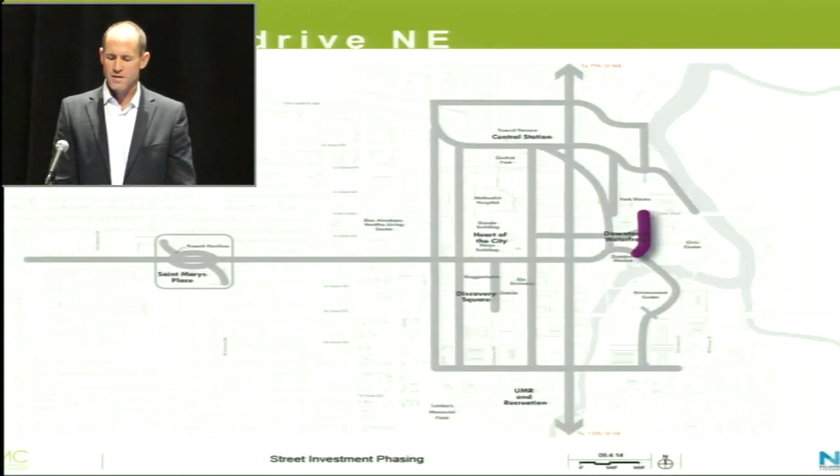Civic Center Drive in front of the convention center, in front of where we are here, is a street we really feel is overbuilt—there's just too much pavement out there. It's not comfortable from a pedestrian standpoint today, and certainly won't be conducive to the type of environment Peter talked about earlier. So we want to tighten that street up. It'll still carry about as much traffic as it does today, but it becomes a much better place for pedestrians.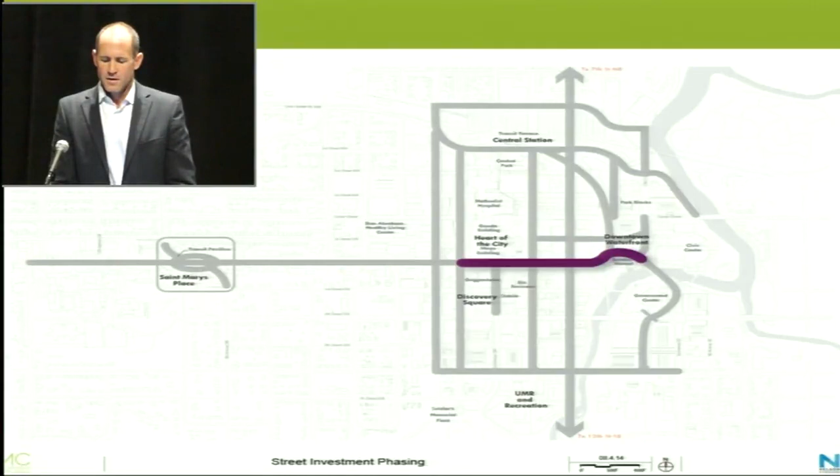2nd Street between the 3rd and 4th couplet and the waterfront district is a street we expect to see probably some of the most transformational change. It connects two of the great neighborhoods of the city and two of the great pedestrian-oriented districts. We'll have transit at the center of that street, rail transit, which is very predictable for people on foot.

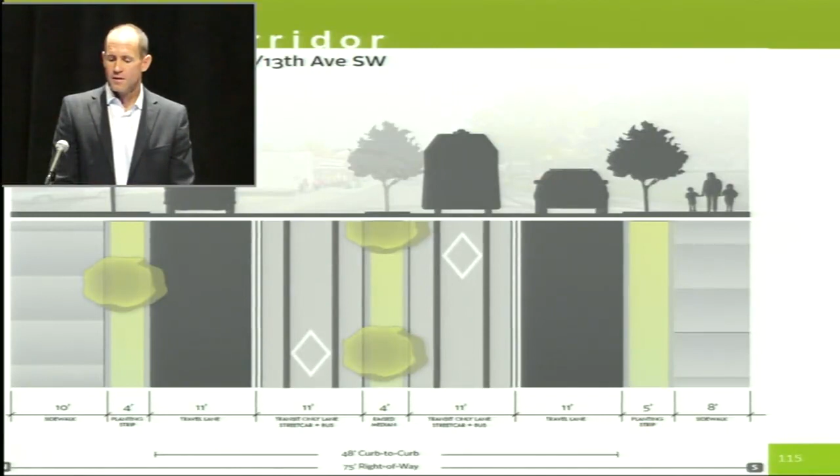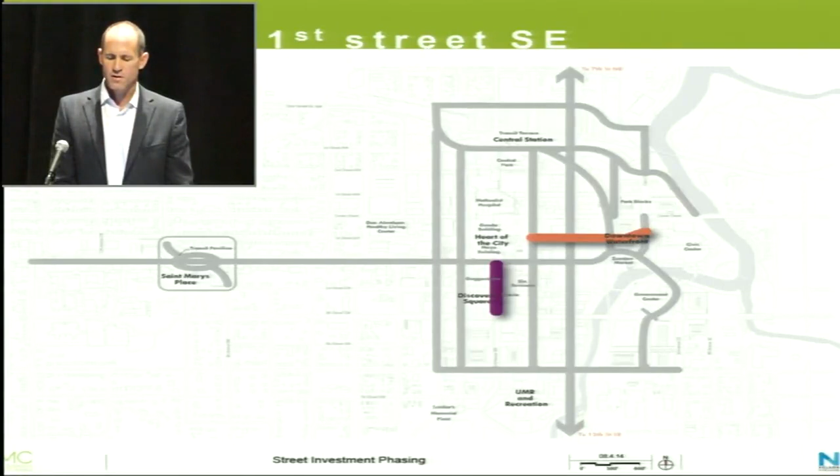So many people have asked us, well, where did the traffic go with the proposed changes? In actuality, we're not changing a lot of actual through capacity on the system, with the exception of 2nd Street potentially, where we may lose a lane for traffic in order to move a lot more people. Things don't change all that much.

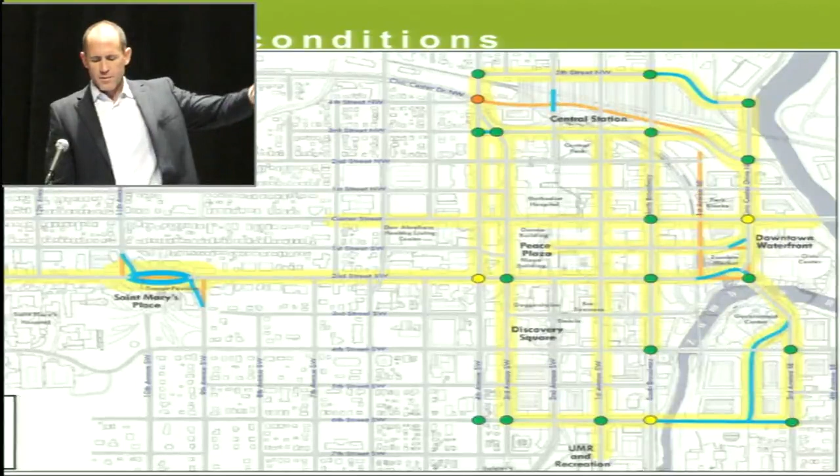There's a huge amount of land use growth, so the DMC is creating more traffic in the system overall, about 28% more trips over a non-DMC scenario in 2040. But with the transit plan and some of the other things we have in place, that number goes down quite a bit, so you're only seeing about 19% growth in traffic, which given the amount of development is actually pretty reasonable. I don't expect people to really digest this fully, but it's just to say one of the things we have done is a lot of detailed traffic modeling to look at how these changes impact the quality of people's experience at various intersections.

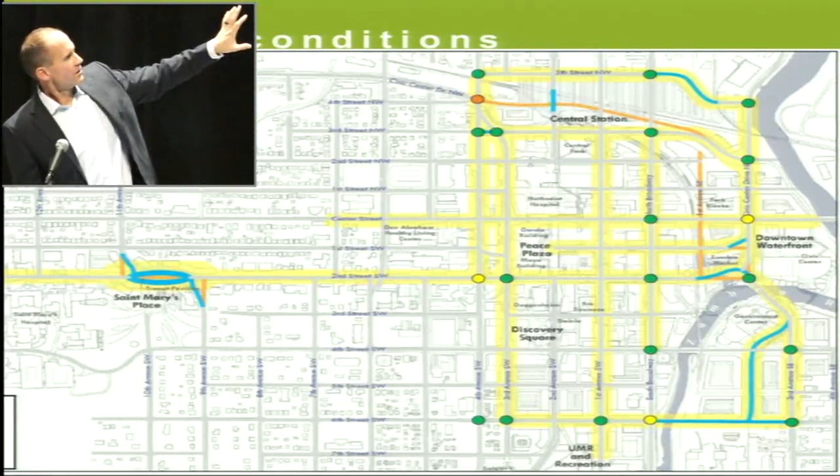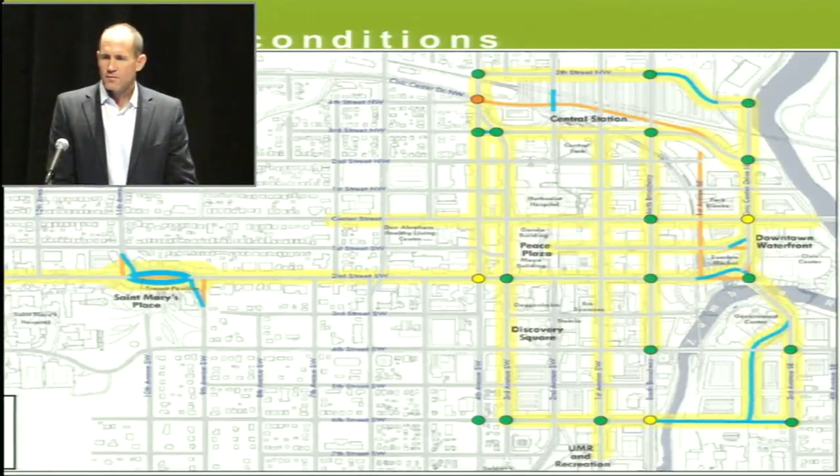Generally where we're seeing green, that's a very excellent level of operation, meaning you wouldn't see too much delay. The yellow and orange intersections show a pretty typical level of urban delay, probably a little more than you might see in Rochester today, but something that's very acceptable in most major cities or bigger cities around the country.

As we talk about the challenge of attracting many new employees to Rochester, we're seeing that college grads are much more interested in living in walkable urban environments, as many as 77% of them saying that's where they want to be when they graduate from college. We're seeing certainly price premiums on real estate in walkable urban neighborhoods, and a pretty clear correlation between high levels of education and strong GDP, people's earnings, in cities that are more walkable.

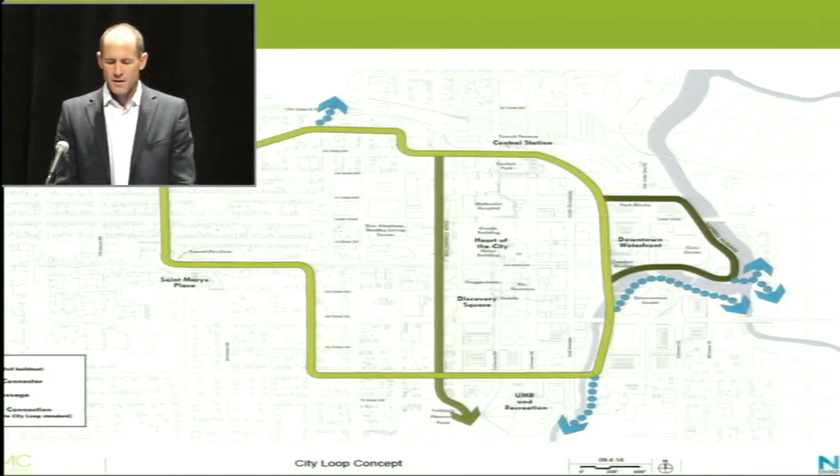One of the things we want to do, I think one of the more exciting things in the plan, is create what we're calling the City Loop, which is really a ring around the downtown connecting to your fantastic trail system, which comes to the edges of downtown but doesn't really penetrate it, as well as a north-south connector through the heart of downtown and the employment core, linking all these neighborhoods. It's really the only thing in the plan that links each of these individual neighborhoods and great experiences.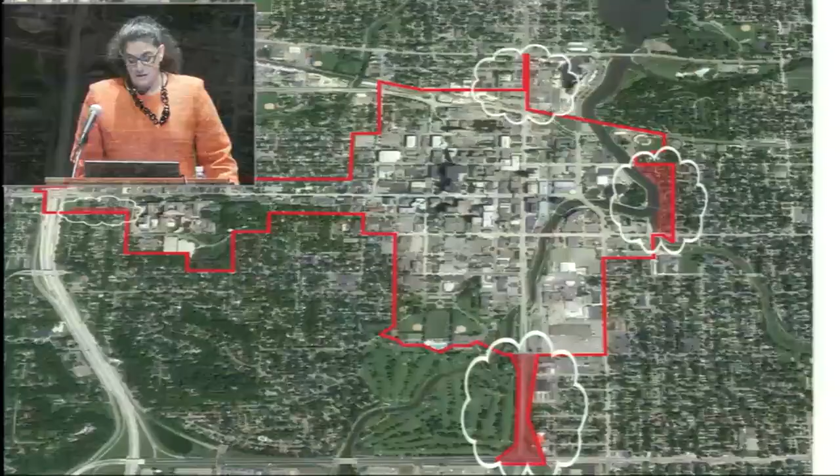The first thing we wanted to talk to you about was the district. Back in September, we introduced the concept of the district and why we had selected the area boundary that we did, which largely had to do with it being the area that, by the city's estimations, by Mayo's estimations, and by our own analysis, is the area of greatest growth potential and the area where the highest need exists for demand of development.

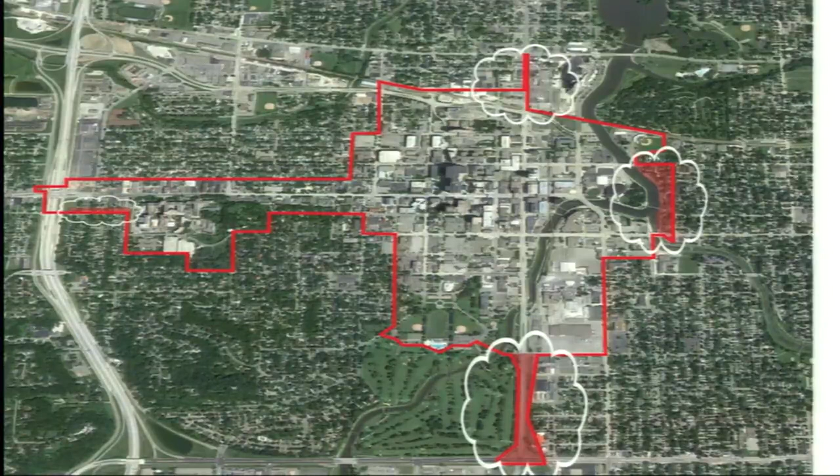The original boundary that we put out in public and asked for input on is shown on the red lines, with the exception of where the clouds are, and that's where some changes were made. Those changes resulted from public input we got from all of you, as well as discussions with the city as the plans have advanced, and discussions with the boards. For instance, today the two boards said it made sense to do the north and south loops of this, extending the boundary along Broadway, because that is a gateway to this city.

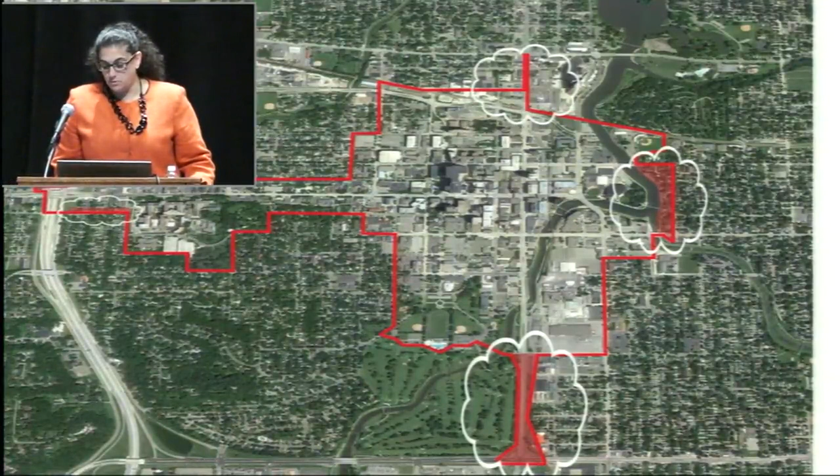And we should think of Broadway as a gateway to the city, and we should extend to look at the entire downtown and those primary entry points. So again, I'm happy to answer any questions.

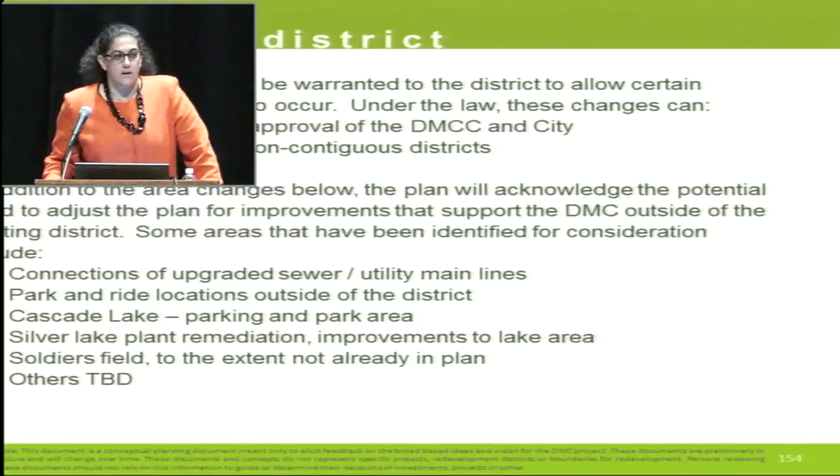I'm gonna keep moving quickly. One thing about the boundary that you should know is that it's not permanent necessarily. It can be changed. In fact, you can have more than one boundary. So if we find over time that development wants to occur in other areas, if we find projects are deemed to be really important to the strategies going forward, we can review the area that is included in the boundary and even create new districts so that the DMC funding can be channeled to the highest best use.

Some examples of that are things like if we do an expansion of the sewer lines to handle growth in the downtown area, we're going to have to connect to the main line. So you may extend the boundary in order to accommodate that.

There are other improvements that are outside of the district. The mayor asked today, what about Cascade Lake? There's a big parking lot out there. There's improvements that are being considered out there. And what we have said is, as projects advance, what we want to see happen is that those projects would come forward with a proposal to change the area, and then that can all be reviewed at the same time.

The funding model itself is based on $585 million of funding that is broken into three categories. The first category is public infrastructure funding, which is general state aid funding, which is $455 million, and approximately $128 million of that comes from the city. The second piece of the funding is the state transit aid, $116 million, or approximately $47 million from the county. The third piece is a sales tax exemption on construction materials, which is $14 million.

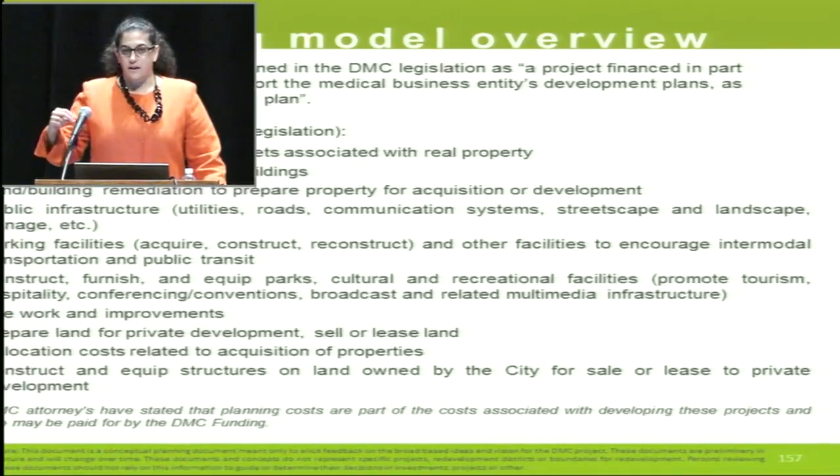So we have defined this broadly to allow for money to flow into economic development initiatives, into strategies. So Peter went through the 6 districts. Those 6 districts are strategies unto themselves, and you need to think about what projects, what catalytic things need to happen in order for the improvements to be made.

The funding model works off of development projects, and so AECOM mentioned they did a program model. That program model translates into an investment model. So basically, as development occurs, private investment is made, and then the funding comes through the legislation, the available funding is measured by a formula which determines how much state aid is available in any given year. Then there's other things that determine how much funding is available.

So there's caps on the high end for how much state funding you could take down in any year. But then there's also a requirement that there's a matching fund. So for instance, to get to the absolute maximum cap of state funding, of $30 million, the city has to invest $11.7 million in public infrastructure dollars per year. And so those two things need to happen together in order to get to the formula.

And so what we've done is we've worked with city staff to identify how much funding we think would be available in any year based on our modeling and on an estimation of available funds, and then tried to phase out how much would come through the model over the 20-year period, really looking at these 5 phases as distinct units.